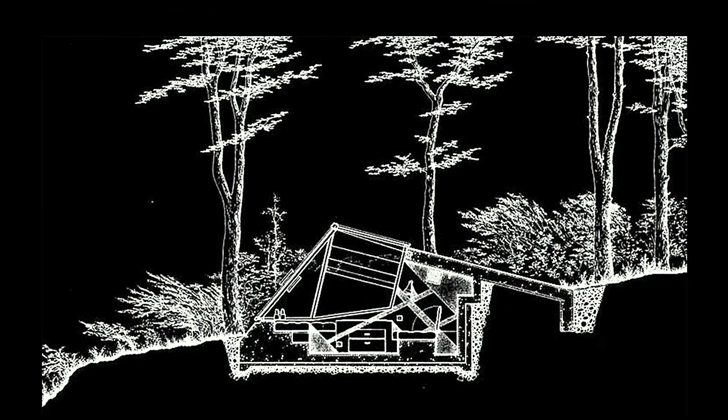And I would like to start by going back almost 50 years and start with one of the smallest buildings we've ever done. This is a small retreat outside a house in the countryside. And it's embedded in nature, and for me, it really raises this question of how do we, as the people inhabiting this planet, relate to nature and inhabit nature. And I think it's also a stark reminder that at the end of the day, we're guests on this planet, and we need to think very carefully how, with our action, we start to alter the balances of the ecosystems, etc., around us.

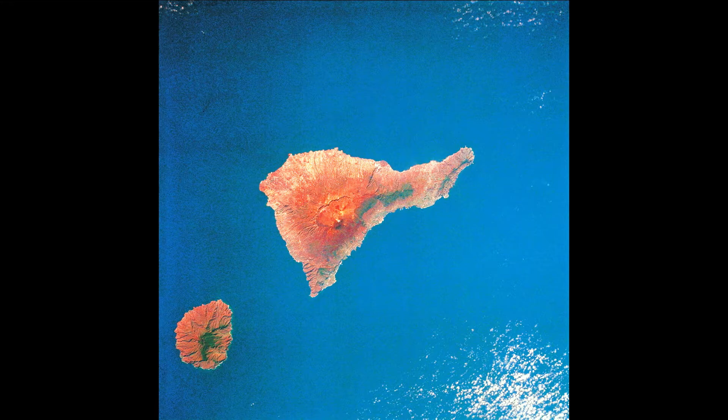I'm going to take you to the Canary Islands, and this is an island called Gomera, which in the 1970s really struggled. The water supply was dwindling, the road network was inadequate, and there was just one hotel on the island. And our client asked us to think about a sustainable vision for tourism in that location. And the lesson for me from that project really is that we need to look backwards to look forwards. Technology often is a blessing, and it allows us to do things that we couldn't do without it, but also it means that sometimes our behavior becomes skewed because of these opportunities. And what we've done here is look back at some of the original developments on the island and think about the building typologies and low-rise buildings that are really adapted to the climate and the local environment.

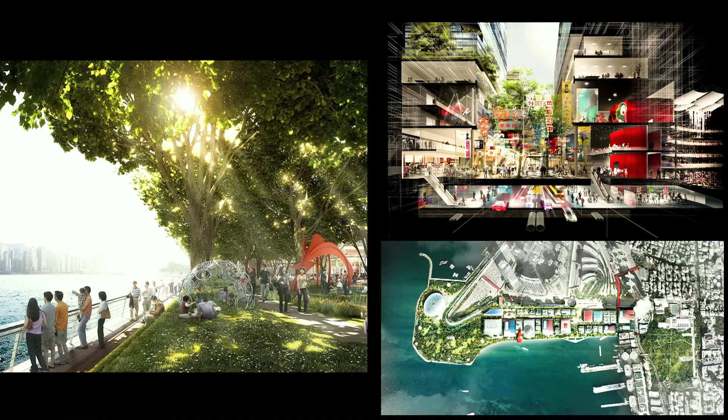These were just 3 projects, but there were 100 other ones that I'm not going to talk about. What we try to do with all these other projects is really to go back to my initial question, think very carefully about how all these projects can provide long-term value, how we can minimize the environmental impact on the planet, but also how we can build communities, because the people on these pictures are the ones that we really care about.

We're based in London, as Helen introduced, and we're about 1,300 staff. And what's interesting about the office is that we really try and bring together the architects and the engineers and a lot of specialists in one big space to create, again, this level of exchange and communication throughout the studio.

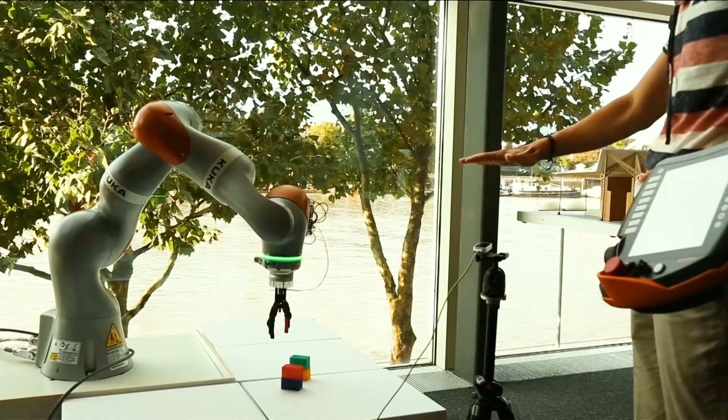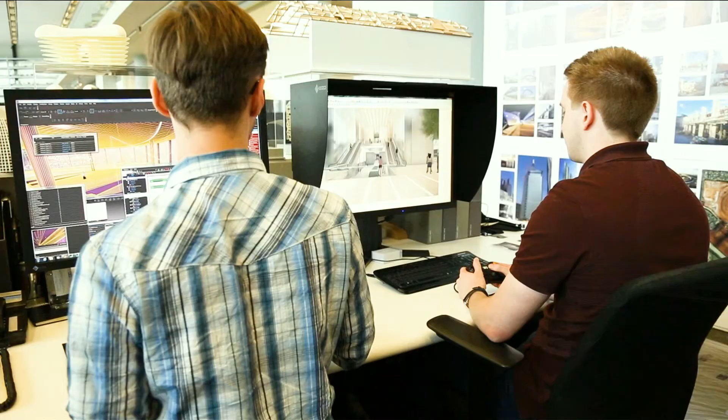And there's a number of people with specialist skills, such as an acoustician, working with them. We have some non-human staff, like this robot arm that is being trained to lift boxes. Which in itself is not rocket science, but I think we understand that R&D is incredibly important, thinking about how construction technology will change.

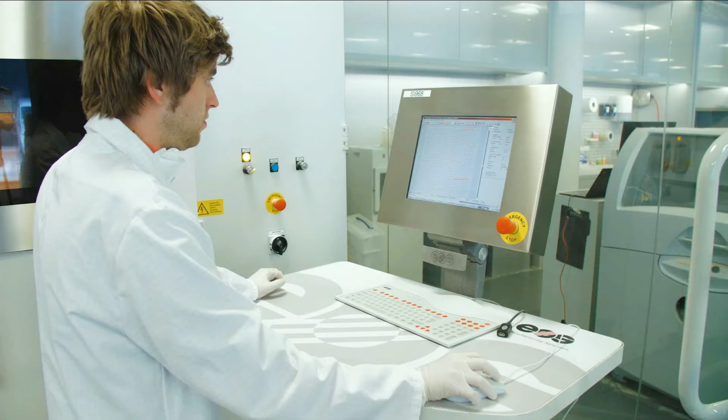We're doing a lot of augmented reality, virtual reality, using games engines to do visualizations and so on. But despite all that technology and the thousands of images that we produce, we still build a lot of models, because at the end of the day, it's a very hands-on way of exploring a building, and it's still something that the clients like. And we've got professional model builders and architects working together, developing these models.

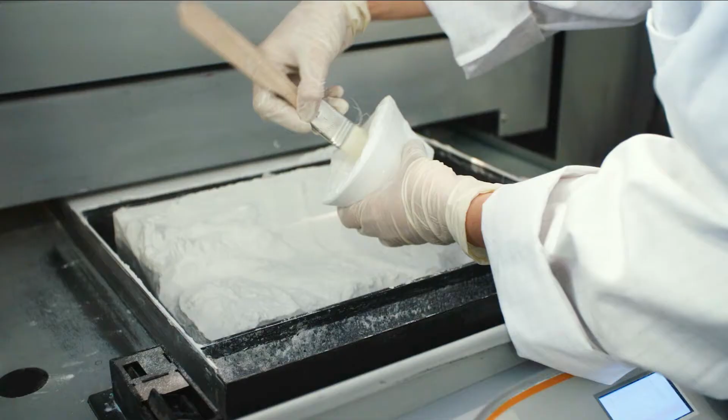We're also using a lot of 3D printing these days, which allows us to build structures that hadn't been possible with traditional means. And these are some of my colleagues de-dusting some of these models as they come out of the machine.

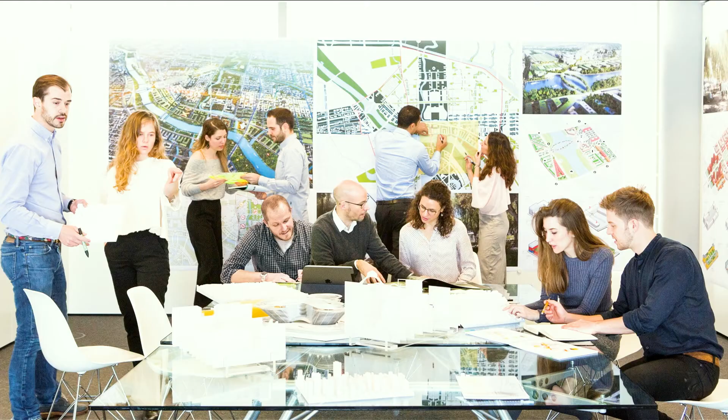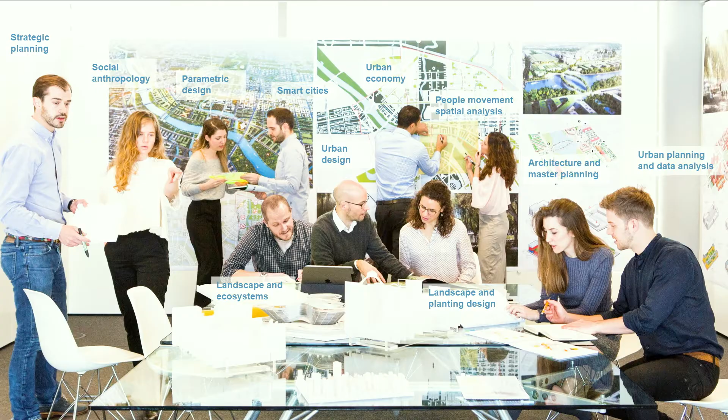Within this organization, there's a small team that I'm heading up, which is the Urban Design Group. And we're trying to follow the same principles of the office, where we're trying to complement the skills that exist elsewhere within the studio. So in my team, we have anything from landscape architects to urban economists, urban planners, and social anthropologists. And we're working together with the architects to think about the urban space in a more holistic and more intelligent way, hopefully.

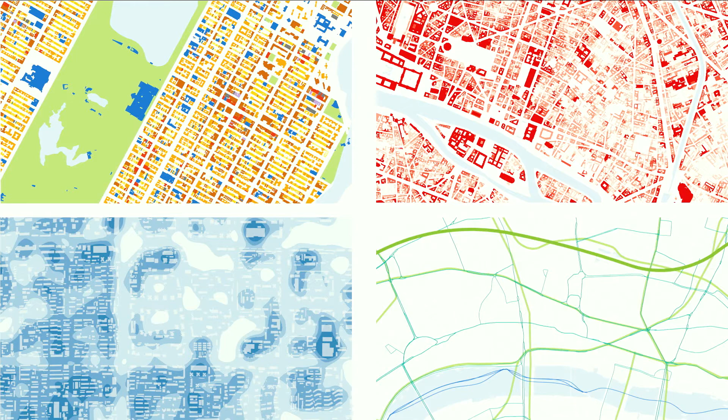A lot of our work is about understanding cities. And we start off with these building footprint maps, or figure ground drawings as we know it. And the great thing about GIS technology is that it allows us to think very carefully about what's happening actually between these buildings and in these spaces. And using that technology, we can look at the land uses in Manhattan. We can think about building heights in Paris, or the building footprint coefficient in Beijing, or transport networks. And all these layers together make up the incredible things that are the cities around us.

But despite all this technology, it's still incredibly important to go to these places and talk to people. And for us, it's combining the quantitative, objective approach with the qualitative approach that really completes the full picture. If you want to create smarter cities, it's about having a smarter way and a smarter process of developing that. And I think that's what we're interested in.

For us, smart cities are not necessarily about sensors and technology only. Yes, they're about creating a city which runs more smoothly or runs more efficiently, but they're also about cities that respond to the context. They're about cities that encourage a more healthy lifestyle, and they're about cities that provide the citizens with information to make the right behavioral choices.

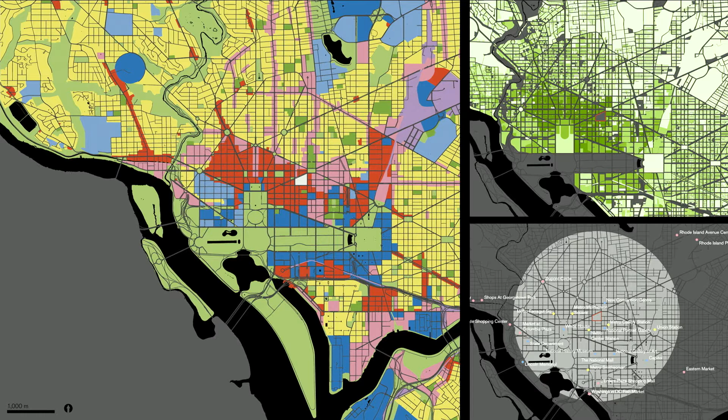What does that mean in practice? This is a project we've recently completed in Washington, D.C. We do a lot of mapping to understand the site context, looking at land uses, land values, and so on. We zoom into the site and look at the movement network. This is the old convention center site in Washington, D.C. And that building really created an obstacle in the urban movement network.

So what we've done in our scheme is really to reconnect the city, which is not just beneficial for the site itself, but also helps the surrounding areas, because cities are really complex organisms and they don't care much about site boundaries that a developer has drawn. So we always need to think about the relationship between the city and the wider context.

And we also need to think about the land uses on the ground floor. And we heard it this morning. I think for us as designers, this is really where life is happening. And by connecting to surrounding streets, we can create more footfall, which in turn enables all the cafes and the restaurants and bars that we all enjoy when we walk through cities.

Now, a lot of things have changed in the last few years, and one of them is that technology has developed quite significantly, and the tools have become much more powerful. The other thing that's happened is that there's an increasing amount of open data that we can use to analyze and do this work. So by putting these two things together, things really start to get more interesting.

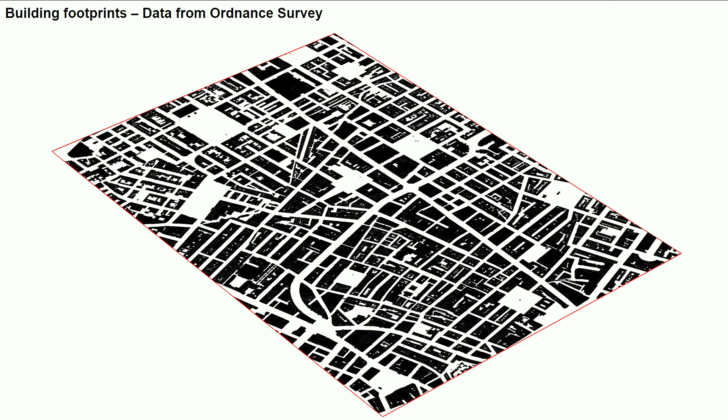A few years ago, we'd have been happy to have a simple building footprint map, as you see on the screen now. Today, we can use LiDAR data to create a 3D point cloud to think about the building heights. And again, we heard about some of that already this morning.

Using ArcMap, we can extract median building heights and then join that back to the building footprints and start to create 3D models. And then using the in-house printing facilities, we can effectively print pieces of cities. And these are really very simple but very clever and insightful ways of comparing cities and benchmarking cities. And we have some very good conversations with our client when we talk about the grain of these places and the grain of places that we design for them.

But there's also a larger scale at which we're using GIS. I'm going to hand on to Theo now to talk about that. Thank you, Bruno. So if we want to build smarter cities, we really need to start by understanding them better. So I'm going to talk to you a little bit more about London.

We started looking at the road network in London, and we ran a network analysis on this road network of streets, of avenues that connect the city together. What's really interesting is that the roads are really the bloodlines of the city. And we have the major arteries that connect to the beating heart, and then the smaller veins that come from it and constitute together this very complex network. And actually all of the major arteries that were picked up by this network analysis are historic roads dating to Roman times. So it's a very old network indeed.

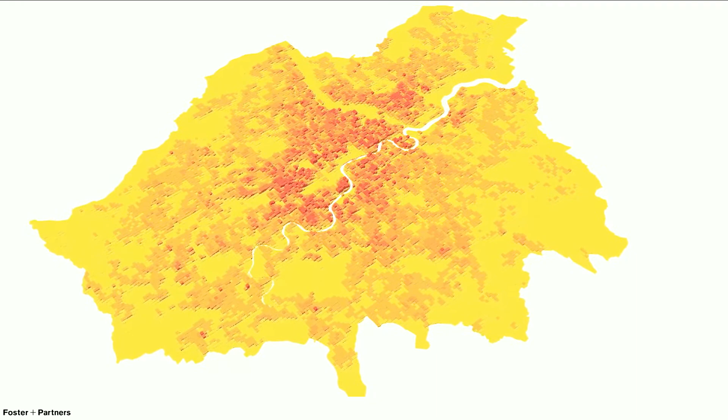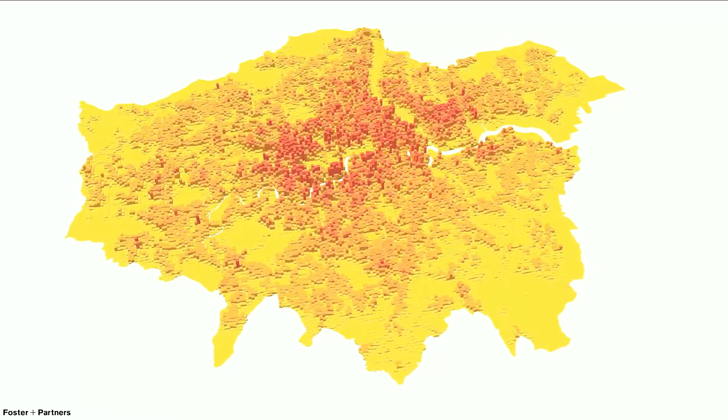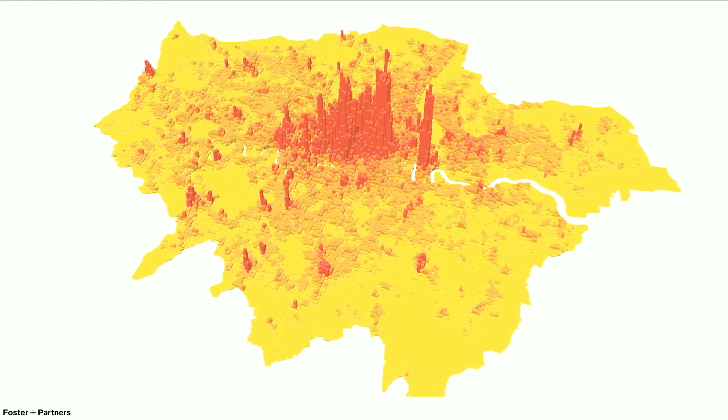Londoners mostly don't live in the center of the city, but in some sort of donut of high-density living. This is showing residential density in the city. But during the course of the day, this changes. And as people go to work, the very center of the city really peaks. That's where most of the jobs are located. And we can see here some other areas, usually near rail stations, where densification happens, and we see an intensification in the use of the space. That's not surprising. It's because most of the jobs are, of course, located in the center of the city.

But interestingly, if we zoom into the center of the city, we really see that different industries cluster in different parts of town. So we have the creative industries in Soho, performing arts around Covent Garden, or, of course, the financial services in the City of London, where about 400,000 people go to work every day. But in the 1990s, a secondary CBD started getting built in London, in Canary Wharf, further in the east. Today, it employs about 100,000 people.

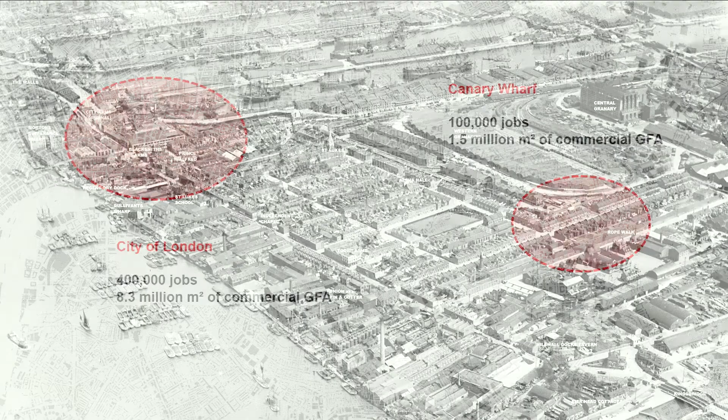That's an interesting story. It's a fairly recent story in London. Canary Wharf didn't look like that just a few years back. That's a picture from the 1920s on the site of Canary Wharf. These were the Docklands, the main port of London. And we can see here a really strong trade center. We can see boats, barges, industry. It was really a powerhouse for London and for the UK, and really its main trading outpost.

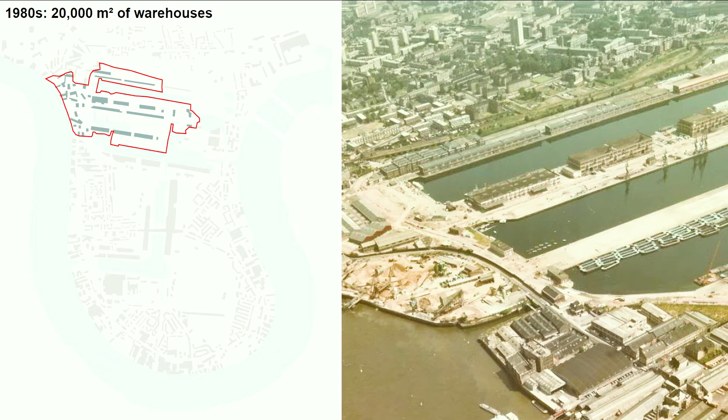But in the second part of the 20th century, the port moved out, and it started a long period of decay and neglect in the area. By the 1980s, there were only empty warehouses and sheds sitting on the site of the port. This was re-tackled in 1981 with the setting up of the London Docklands Development Corporation. But really, it's investment in public transport and public infrastructure that really allowed the area of Canary Wharf to develop. And here we see the Canary Wharf tube station getting built. It's a station that Foster and Partners designed at the time.

And by the 2000s, Canary Wharf had really become the secondary CBD of London. Here we still see the tube station in the middle by the dock, and we see how the towers have gathered around the station, really creating a cluster of high density. And this is how the station looks today. The station was designed for ample spaces, a lot of natural light coming through, and is today one of London's busiest tube stations, with about 1 million people going through it every week. This, in turn, creates a lot of footfall, which animates the space and allows the retail to flourish.

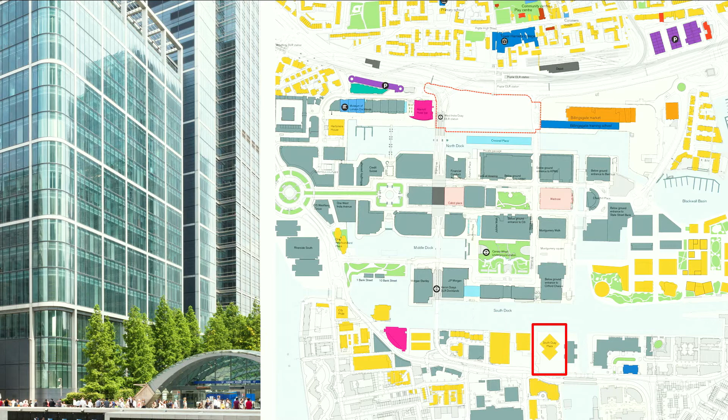Around the Canary Wharf station, the first buildings were commercial offices, here shown in grey. But more recently, perhaps, we had residential development, which really started to happen around this financial services district. And these are shown here in yellow. We're actually involved in one of those projects, designing London's tallest residential building in South Quay Plaza.

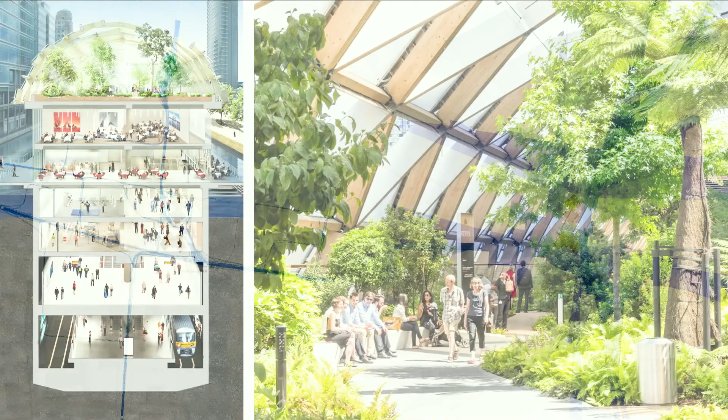In Canary Wharf, we're also involved in designing the Crossrail station, which is actually complete. And we've designed it again with shops and with connection to nearby buildings to create really a transit-oriented development around it to continue the long story of Canary Wharf. But we've also designed it with a public space on top, a garden under this roof. And in a nice reminder of our design philosophy, here again, people come first: the garden is already open.

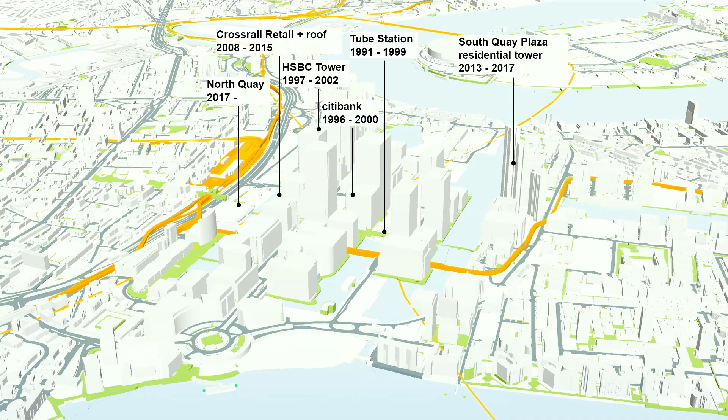So we've been involved in Canary Wharf as a practice for the past 30 years, and we're still involved there today. And we've learned a lot about how infrastructure can actually unlock the potential of a place. And we're taking this belief and those learnings everywhere we go. We looked at High Speed Rail in the UK, High Speed 2, and we looked at it as more than just a rail connector, but also as a potential spine of infrastructure that would carry networks, utilities, perhaps high-speed internet, and that would be landscaped in the existing countryside, offering new possibilities for walking and cycling too.

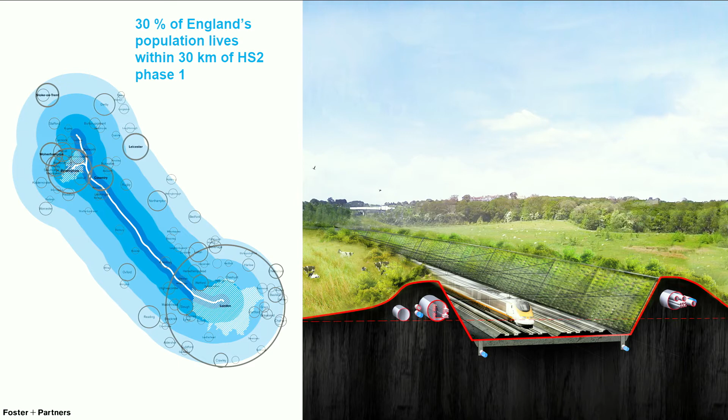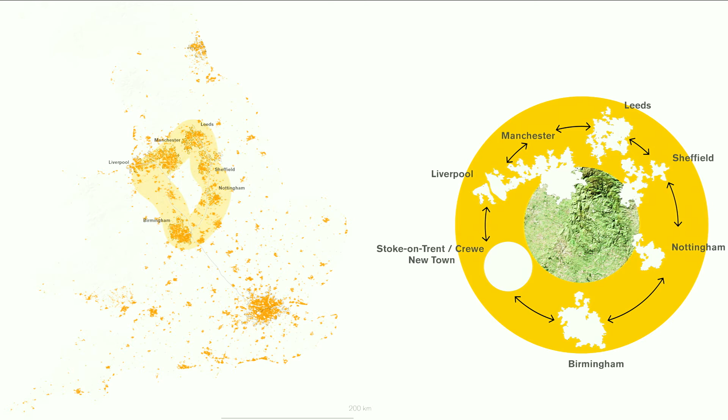Looking at the future phases of High Speed 2, we're looking at how cities in the north are actually very well connected, and with High Speed 2, we'll create a true new urban region. 6 of Britain's 8 conurbations are located in short proximity, and there might be a potential for a 7th city to actually come and complete this hyper-connected urban region.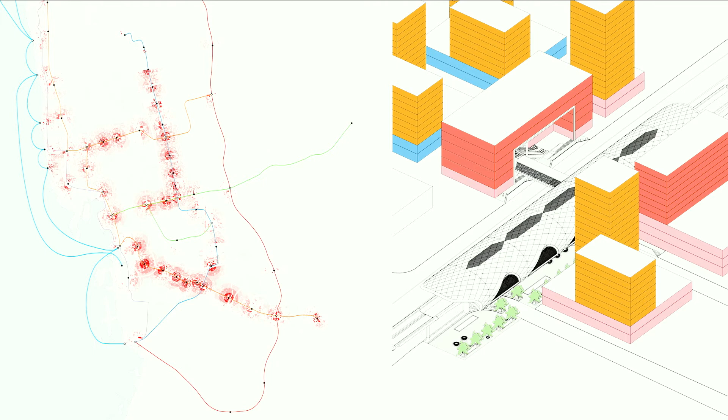And finally, we took this same thinking elsewhere in the world. We were asked a few years back to design a metro system for Jeddah in Saudi Arabia. And we actually looked at it not only from the eye of a designer designing stations, but in terms of urban design. How could stations actually transform the way the city worked? So we looked at each station, used GIS to do that, looked at the socioeconomics around each station to assess the potential of each station to create a new development.

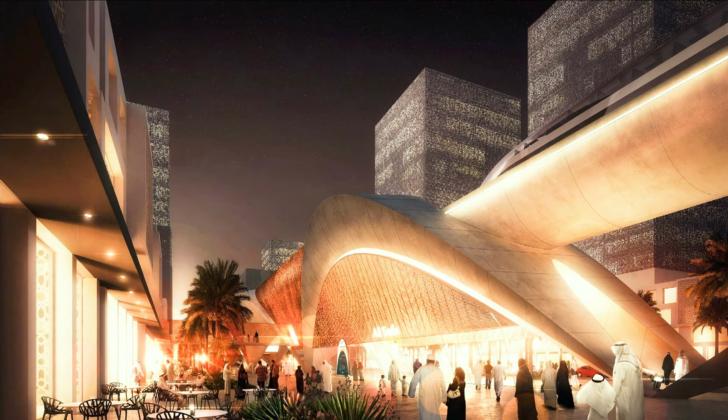And GIS really helped us first in understanding how we can fit stations in a very busy urban environment, but also to understand the socioeconomic context around it. Because really what we wanted is that each station creates a place, creates a new sustainable neighborhood. So that's the street with the station. And that's the street with the future development that we foresee. And you see here retail, and you can see people animating the ground plane, because we believe that really smarter cities are not only about moving people around more efficiently, but about creating places where people want to stay. Thank you.

It's very good timing.

So this is an amazing story about smart cities being more than technology. And I think your firm is so much more than what people traditionally think of architects building buildings. You're building society, you're building space, you're building futures, as I talked about at the very start. But after visiting you and seeing some amazing work you're doing, one thing that struck me when I came back to the US and was driving back from LAX is that this isn't happening in the United States.

But you're working in Washington, making some changes in New York. Yes. What do you think this thinking that you have will ultimately bring about in the next 5 to 10 years in the US? Well, it's a very good question. I think the challenge of change and managing change is enormous, because so much money is invested in real estate and infrastructure, and it's obviously not very easy to just pull that all down and replace it. And I think the story of Jeddah is an interesting one, because there we can start from ground zero up and effectively create a new piece of infrastructure.